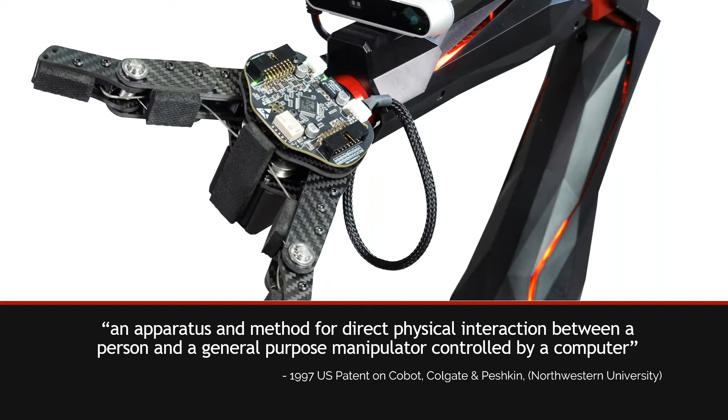According to the International Federation of Robotics, collaborative manufacturing applications can be classified into 4 different levels. In the first level, a human and robot work alongside each other, but with no shared workspace, something referred to as coexistence.

Given constraints in space, the second level combines the physical workspace of the manipulator and the human, allowing the two to share such a workspace. However, the two cannot actually operate at the same time. This essentially separates their workspace temporally instead of spatially, referred to by the IFR as sequential collaboration.

In the third level, humans and manipulators can operate at the same time and even work on the same part or machine. However, they come in no contact with each other. This contact, of course, could be deliberate and physical, but from an abstract perspective, this also refers to any tracking or sensing from the robot's side. The human operator could, of course, be keeping an eye on the manipulator and its motion, but not vice versa.

This level, called cooperation, is the first to allow the robot and human to share their workspace, both spatially and temporally. At this point, we can start seeing that we're running into concerns about human or operator safety.

In the fourth and final level, the robot responds in real time to the worker's motion. The robot must maintain an active awareness of the location and motion of the human operator and always take precautions to not harm the worker in any way. Now we are talking about added sensor suites on the manipulator, vision, and potentially artificial intelligence as well.

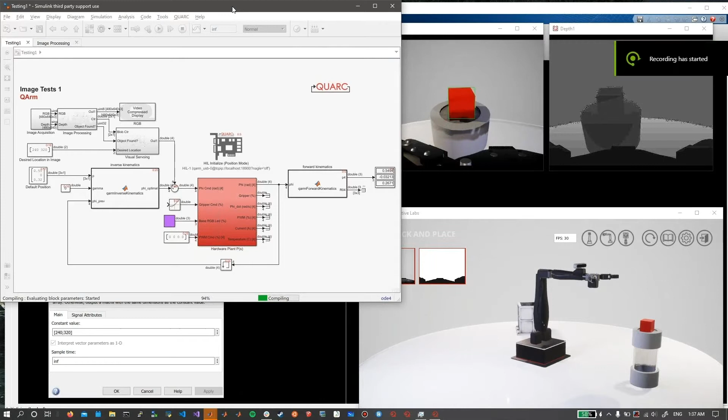The demo that I'm going to show you today began in my lecture room a couple of weeks ago. In addition to being a research and development engineer at Quanser, I'm currently also a sessional lecturer at the University of Toronto, where I'm teaching a graduate course in manipulator robotics.

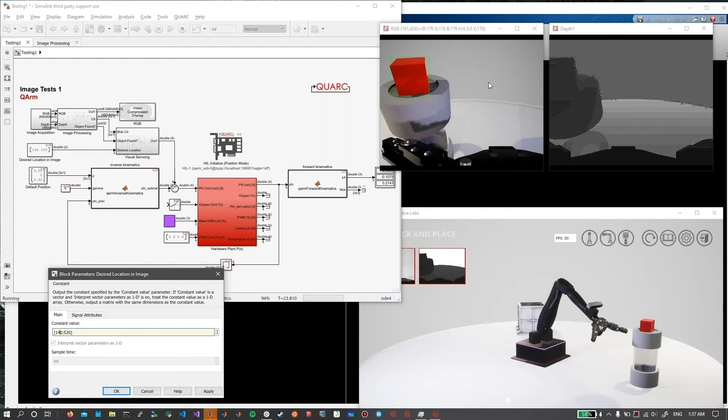We were at a stage in the course where we discussed robot vision, and after an overview of common topics such as color spaces, thresholding, blob detection, etc., we looked at a visual servoing example using the virtual QArm manipulator. All the students had access to this virtual manipulator on their own laptops via the Quanser Interactive Labs solution, which allowed them to try this example themselves.

In this example, the object is stationary and my arm is responding and moving so as to bring the object in the image at the desired pixel location that you can see me setting at the bottom left of the screen.

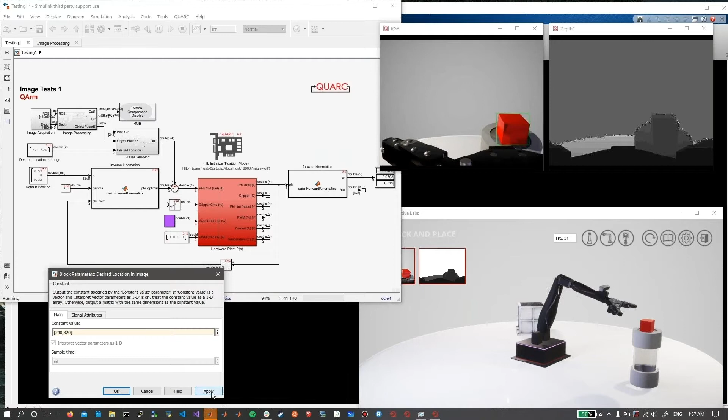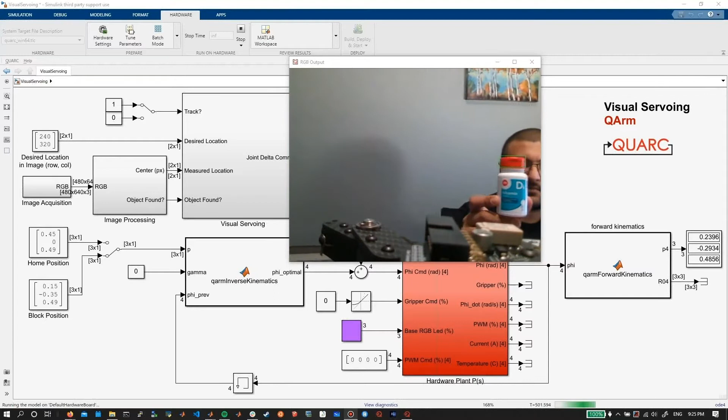After this lecture, I decided to try this on the hardware at home. Now, the object itself in this example can also move as the arm is tracking it. The arm moves horizontally and vertically by directly actuating the manipulator in joint space. A horizontal pixel error is removed by actuating the base joint of the manipulator about the vertical Z-axis.

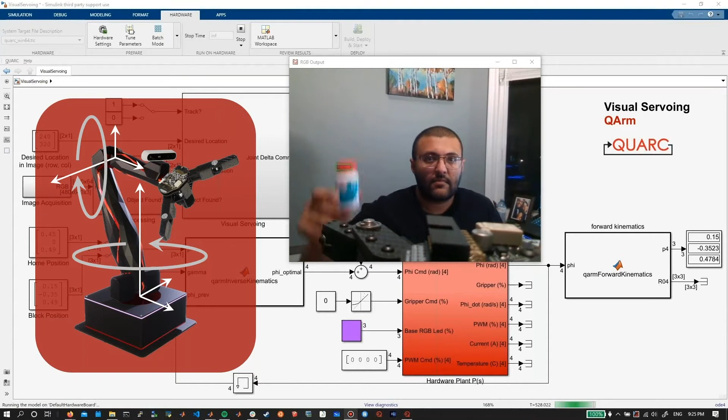And a vertical error is negated by actuating the elbow joint, making the problem a rather simple one and based purely on joint space calculations and kinematics. The tracking itself can vary dramatically with different lighting conditions and the size of the object in the image. So if I were to take a few steps backward, the lid of that vitamin bottle would be very small, and my algorithm most likely will fail to pick it up correctly.

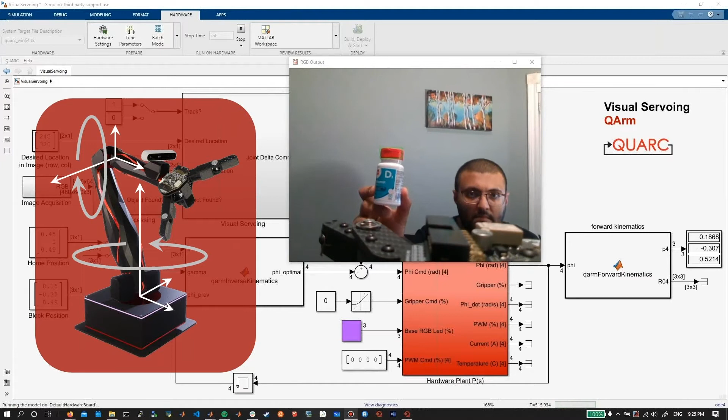To increase my personal sense of security, I did two things in this demo. Firstly, if the object disappeared, the arm would return to a known starting location, in this case, the position where it's facing me. And you will see this in a minute when I take that bottle and yank it out of the workspace and the arm faces me directly. Secondly, I placed additional safety limits to shut the controllers if the speed ever exceeded 45 degrees per second. That's really slow, but this gave me a lot of peace.

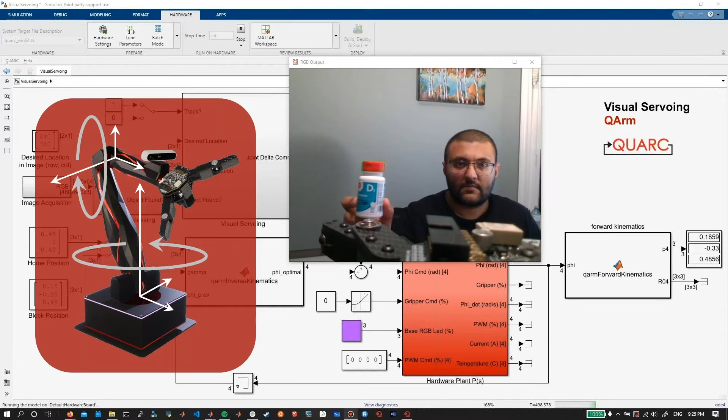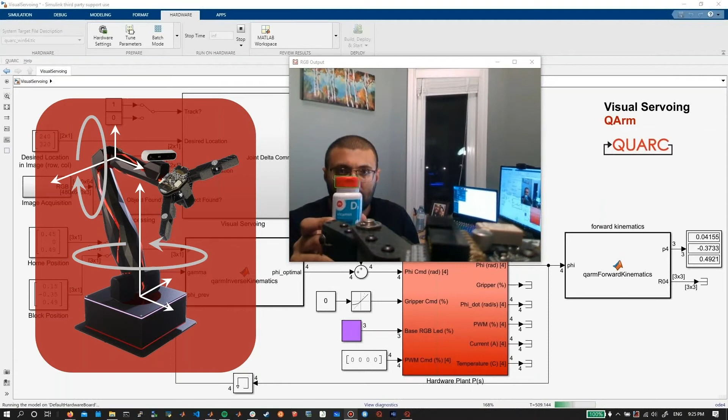It felt great at the time I recorded this demo, but come on, safety by means of limitation doesn't actually help me sleep at night. I did not intend to handicap the manipulator or its capabilities. Rather, I wanted the arm to have more freedom and start tracking how far away it was from me. I reminded myself that with 2 degrees in engineering and over 7 years of experience working with robotics and automation, manipulators should be afraid of me and not the other way around.

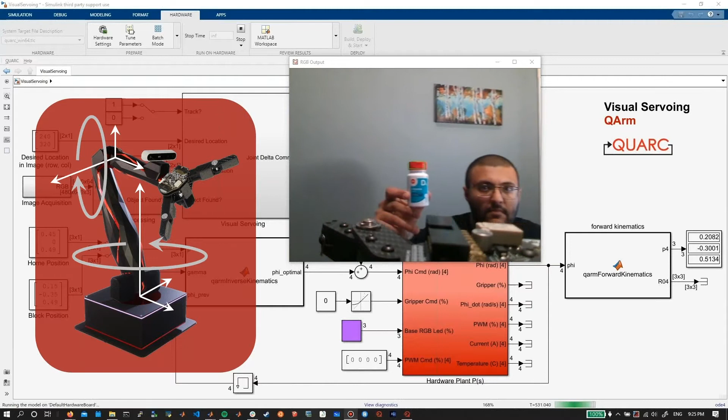I decided to repeat this demonstration, but now with the added capability of tracking the distance between myself and the robot using a stereo depth camera on board the manipulator. And so with that, I'm not going to waste any more time. Let's get into the actual demonstration. This is going to be in Simulink.

So everything that I have in red, which are these subsystems, are doing some form of input-output. They are capturing information or writing information to a device. So here I am capturing very simple toggles or trigger values from a Logitech joystick that I have. I'm not interested in using the joystick to drive the manipulator. Instead, what I'm doing is grabbing Boolean values such as track, grab, or color that allow me to change certain aspects of the code. Then I have an image acquisition subsystem that is capturing depth as well as RGB data.

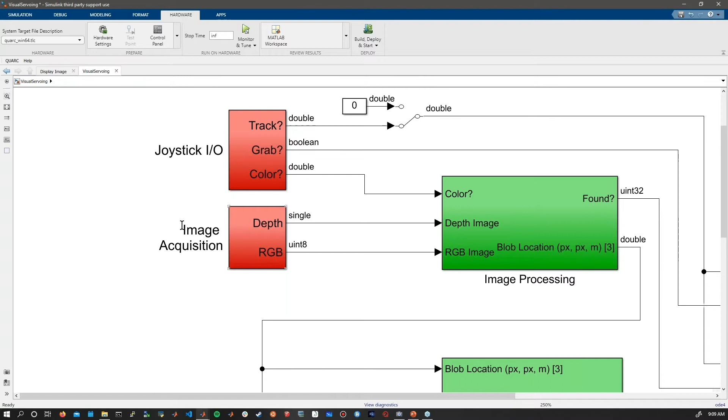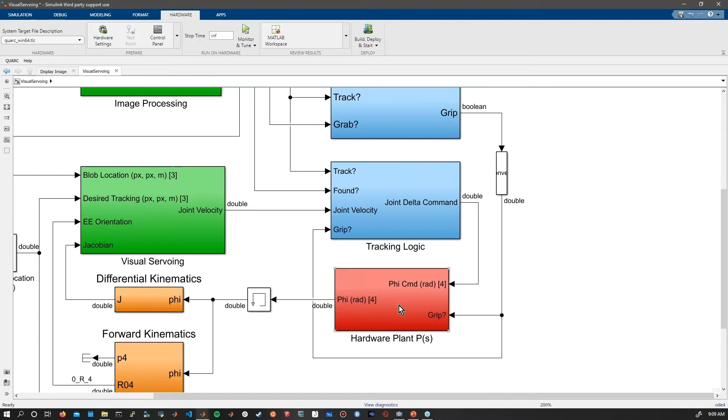And then this subsystem is the hardware plant that allows me to read joint values from the arm, as well as write the intended joint commands and whether or not I would like to actuate the gripper. So I am actuating the arm in position mode, and the low-level controllers are handling the motion for me. In addition to that, I have two green subsystems. These are for image processing. And then I have some logic and timing, and then some kinematics in orange.

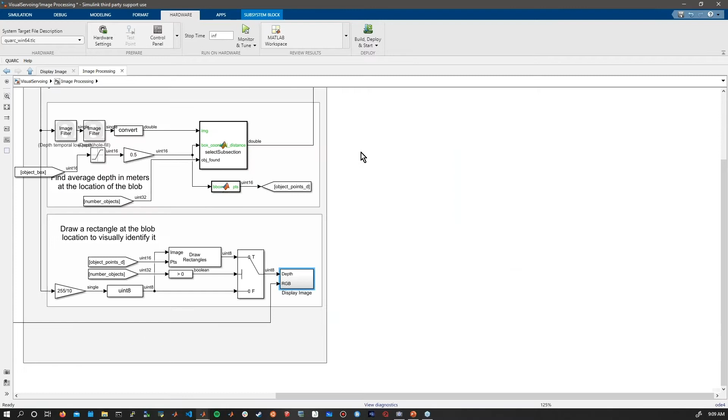So let's start by looking at the image processing subsystem here. I have both RGB processing as well as depth. And the idea is to take your RGB image, convert it from RGB space to HSV, threshold for a green or a red object, as you will see in a minute, and then take that bitonal or binary image and pass it to a blob detection algorithm that looks at connected components to label them. And that gives me the position of the blob it's found, and I pass that information to the depth processing.

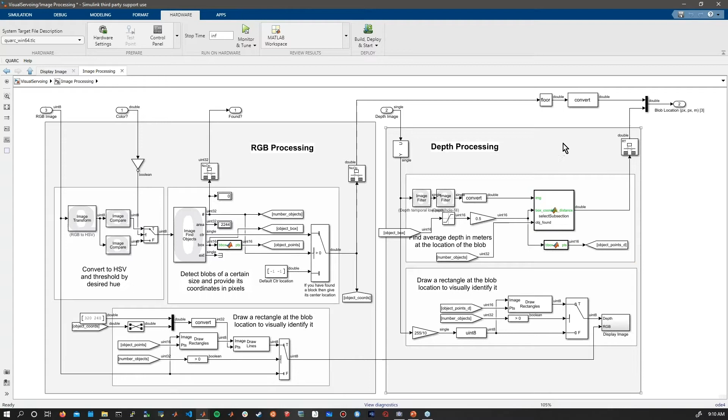The depth processing then takes the entire depth image, and after a temporal low-pass filter and a depth hole filter, it will select all the depth pixels around the object's coordinates and average them to give me the depth to the object in meters. And so that gives me the X and Y location of the blob in the image, as well as the depth, which is the Z direction in the image coordinates. And I take that blob information and pass it out of the subsystem.

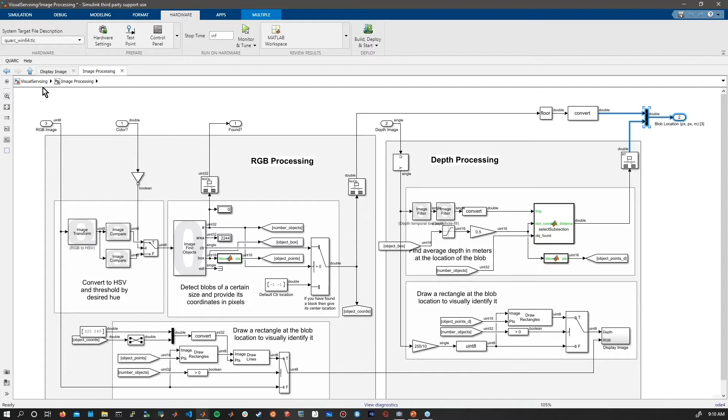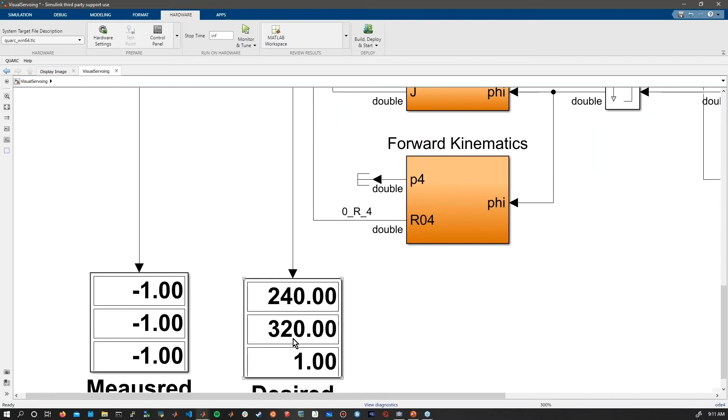I then pass that to visual servoing, which is also getting kinematic information such as the orientation of the end effector, as well as the Jacobian through differential kinematics. And I'm also passing it my desired coordinates for the blob. So you can see here, I want the blob to be in the center of my 480 by 640 image, and I want it to be 1 meter away from me. And if I pass it to this algorithm, after filtering the blob data, it is simply applying some scaling and sign correction. And that gives me end effector velocities in X, Y, and Z.

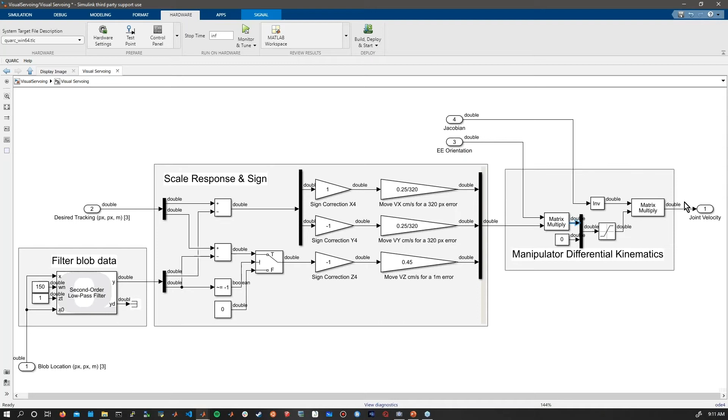I need to convert that into base frame coordinates. So I do that by using the orientation right here. And I take these base frame end effector velocities and turn them into joint velocities using the Jacobian.

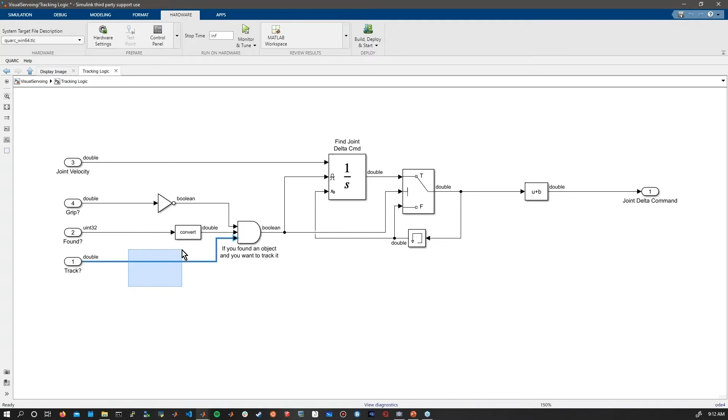That then gets passed to the tracking logic, which says simple things such as, well, if you are being asked to track the object and you've actually found an object and you're not currently gripping the object itself, then proceed to integrate those joint velocities into joint commands and apply them to the manipulator.

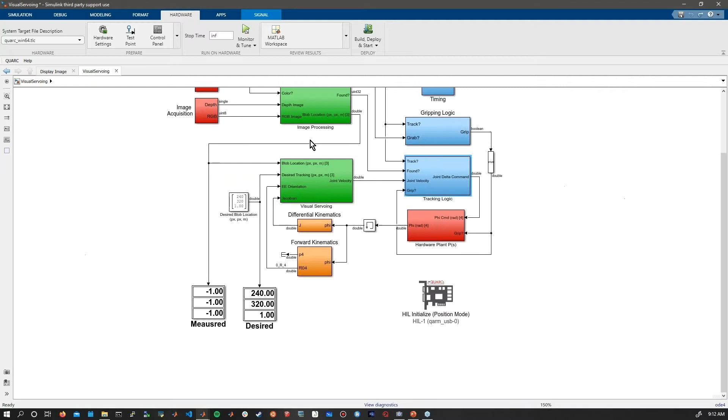So now that we have an idea of what this is doing, I'm going to move this to the left, and let's start by actually running the demonstration. So I've used the monitor and tune button here in the hardware tab in Simulink, and that will build C code from this application and deploy it to my Windows machine as a controller, controlling the arm via a USB connection.

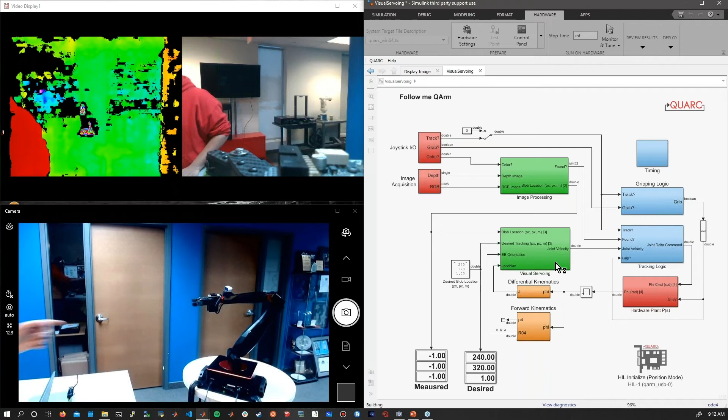Okay, so now that the LED on the base has turned blue, the code is actually running. And here you can see that is me right here in red. At the top left, you can see two images. The first part, which is on the left, is the depth data. So as my arm moves closer to it or further away from it, you can see my depth changes. And I'm applying a color map so you can visualize the depth a little easier.

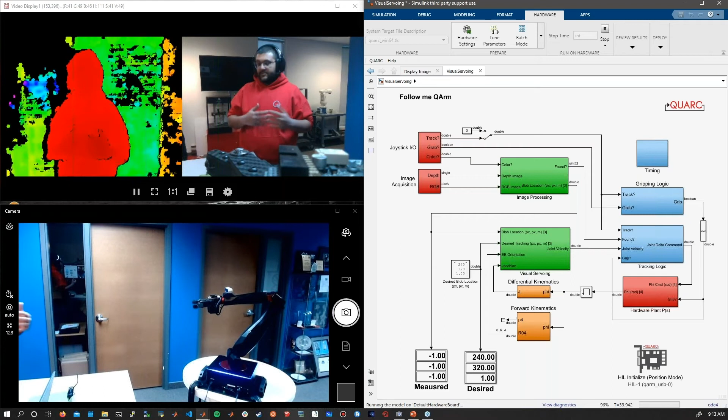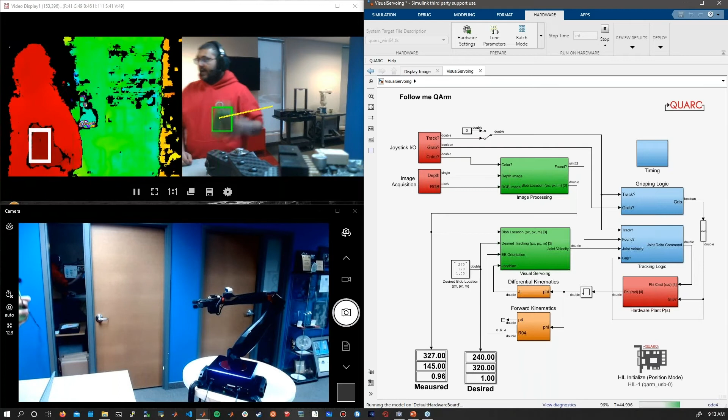Now, it is coincidence that at roughly the desired distance, which is about 1 meter right now, the depth data is actually red and I'm wearing red, but that again is a coincidence. This wasn't planned. But what I'm going to be doing here is I have an object right here that I've picked up. This is green, of course, and I want the camera to track this object.

So based on the videos that I have posted on LinkedIn in the past, and you saw me show you in the presentation, what the arm would do is track it left and right. But in this case, it will also track depth to the object.

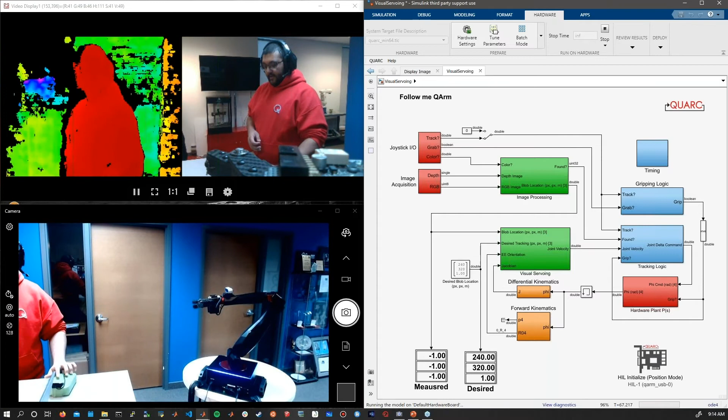Now, before I run it, I have to tell you how exactly I'm using this joystick. And so on this joystick at the very top, I have two triggers. And these are going to allow me to ask the arm to start tracking me or stop. And it's going to allow me to pick the color of the tracking.

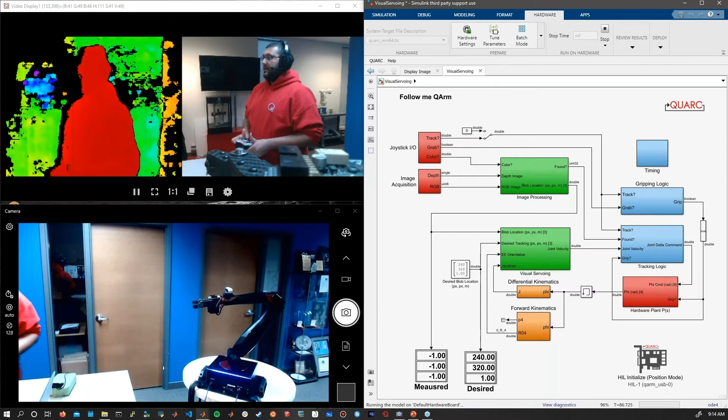So you can see here that the webinar screen sharing is starting to slow down my controller a little bit here. And I think it's back. There we go. Okay. So let's go back to this object.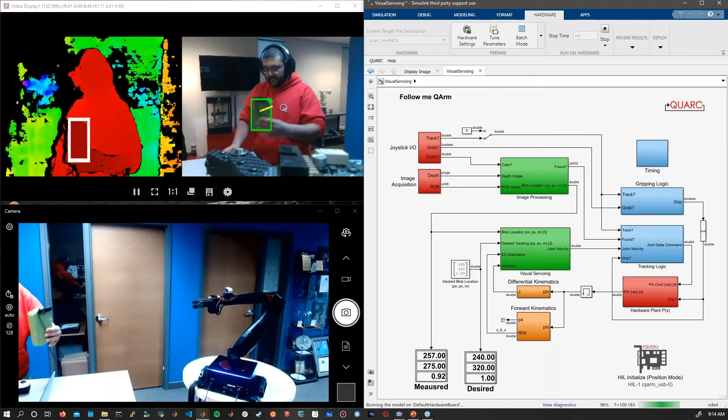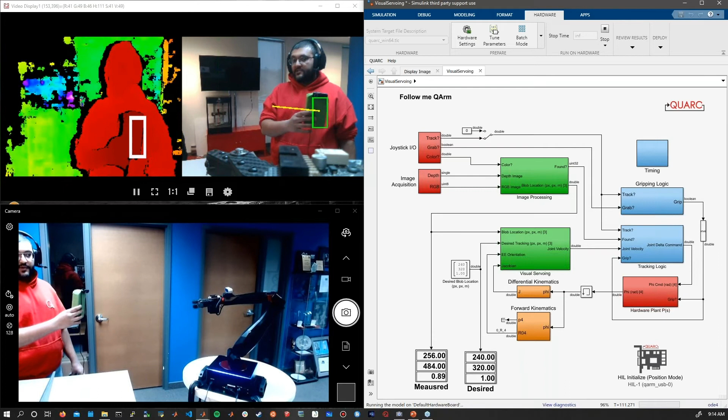The yellow line is drawn from the center of the RGB image to the current location of the blob, and it should give you a sense of where the arm will respond and move towards. So if I use the first toggle, it will go from tracking this object, which is green, to tracking me, which is red. But I want it to track the object right now. Let me hit the second toggle.

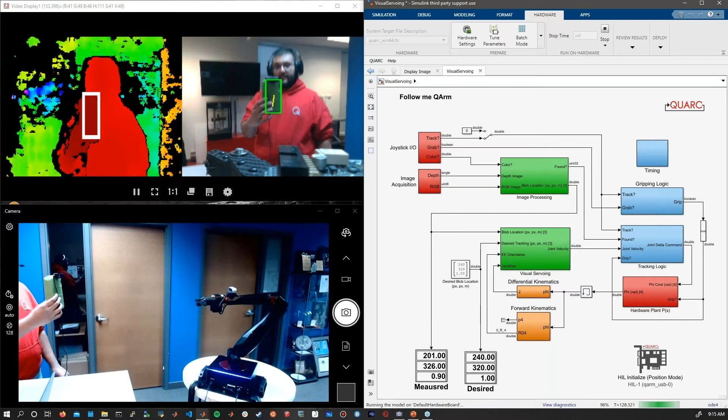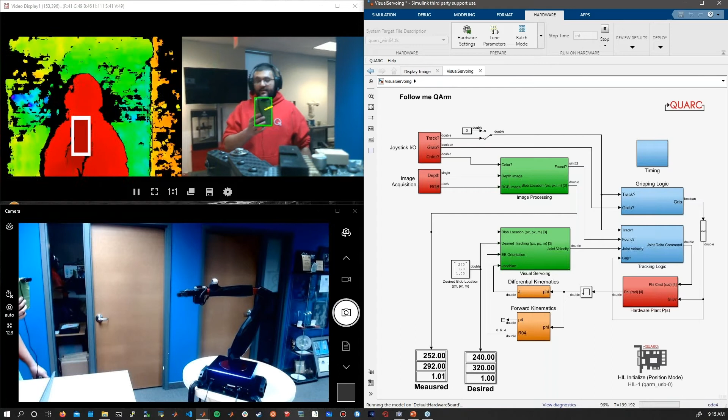And right here, you can see the arm starting to track this object. As I move further away, it comes towards me. If I go closer, it moves back. But I can move it around, and it tracks the object.

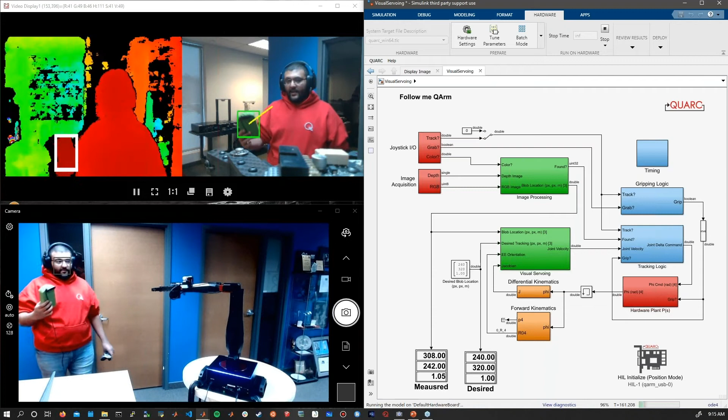Now, at the same time, I could tell it to simply start tracking me. And so this is where I am. And let's see if it actually tracks me as well. And it's trying to keep 1 meter of a distance from me as I move around in this space.

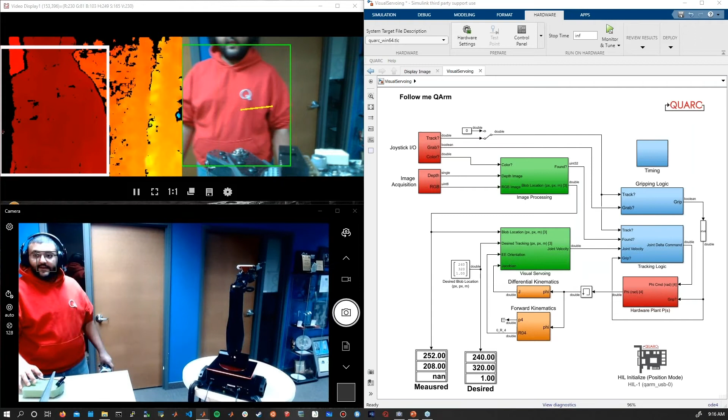And that right there was a workspace singularity. So you can see that the LED has turned red, the model has actually stopped, and this was the speed safety limit that I had put into place. So I got a message right here. The arm was moving close to a maximum speed. And so that has stopped this controller, which was designed for safety.

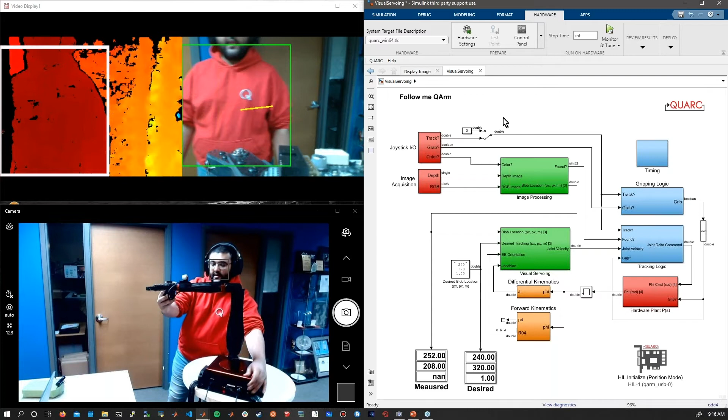So I can reset the arm by simply powering it off and restarting it and deploying the model again.

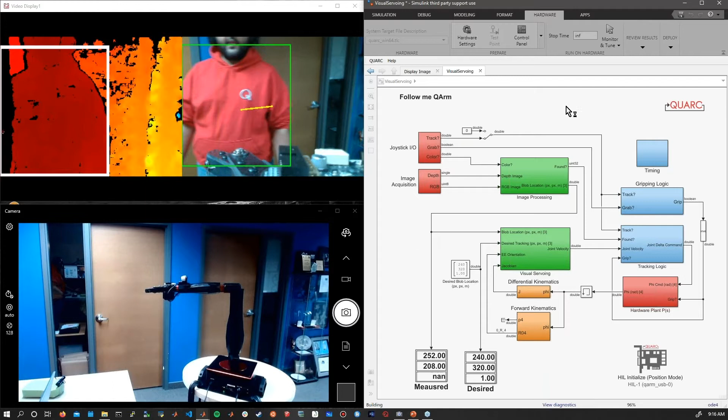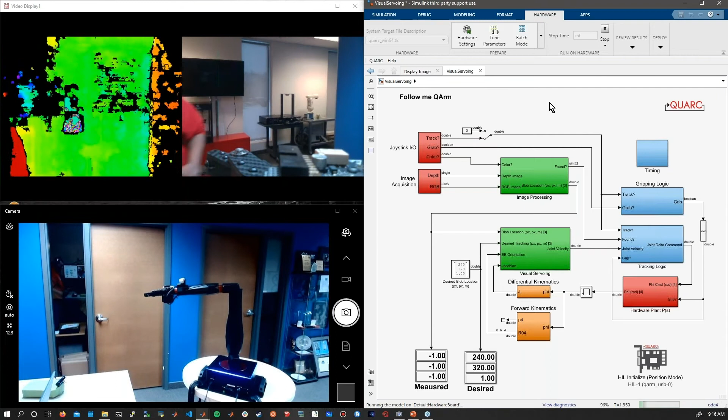There we go. Back to this object and being able to track it. So this is the idea with Simulink. You can easily change the controllers as you desire, monitor what's exactly going on in real time. If something happens, you can check out all your scopes to see what exactly went wrong and then retry again.

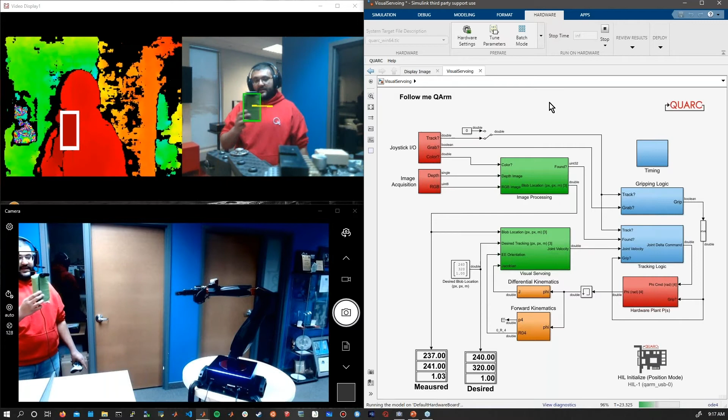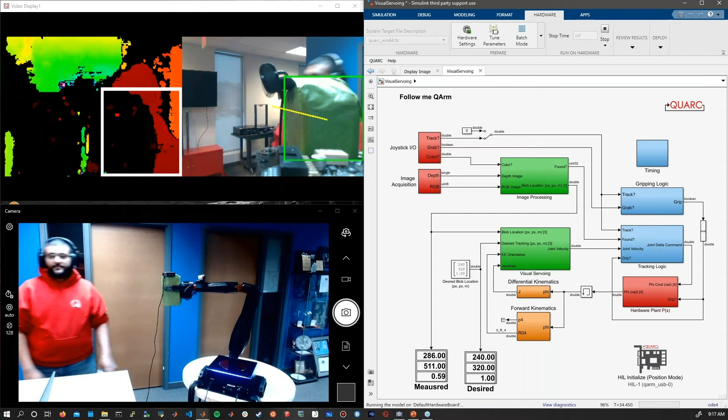At the same time, I can tell this manipulator to simply go ahead and grab the object. And that's the demo.

So where do you actually go from here onwards, right? The depth data here is calculated using the left and right infrared cameras on the Intel RealSense right now. And I am using the depth data that's coming straight from the camera, but you could, of course, use the infrared directly to estimate your own depth and improve the depth quality.

I'm also currently assuming that the depth and RGB feed share pixel coordinates because I have the same camera resolution. But the lenses have a small linear displacement between them, which needs to also be accounted for. You can also use the camera that's right here with pre-trained neural networks or object classifiers to recognize humans, recognize objects, and then take action based on that.

You can add additional safety routines to avoid singularities. You could add your own sensors using the onboard end effector board that we have to sense them and actuate and get the data you need. You can also use the onboard current sensors at each of the joints to detect if the arm has come into contact with an object or a person. And you can add multiple cameras to track the workspace that is being shared between the human and the arm and identify both their motion.

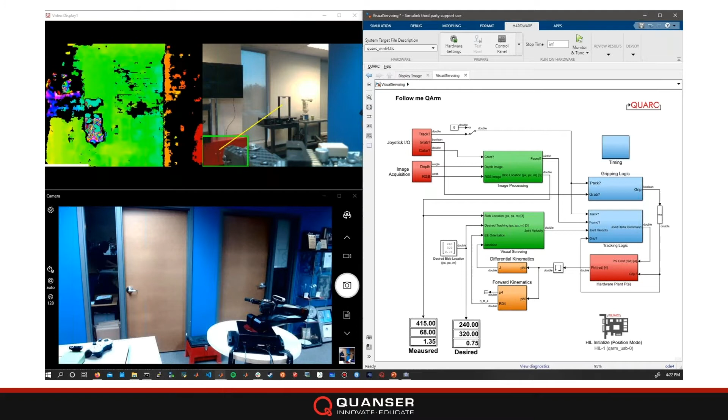Now, the idea here is that it took me less than a week to develop and validate this demonstration on the QArm with my limited knowledge in robot vision. With your resources, knowledge, time, and an army of PhD students, I can only wonder where you can take your own ideas. If you have any questions, I will be happy to take them, and then I can also get into more details of the algorithm with you based on the questions.

Thanks, Murtaza. That was a fantastic presentation. I really enjoyed it, and I hope everybody else did as well. A couple of questions have come in.

First one, is the solution out of the box a cobot? Okay, so the International Federation of Robotics defines many different levels of collaboration between robots and humans. And so a manipulator being a cobot has to have a lot of onboard safety introduced by default. And so this manipulator is a 4-degree of freedom arm that can enable you to do cobotics research and implement your cobotics algorithms to verify that they work before you deploy them to other cobots.

Now, more often than not, industrial cobots come with their own proprietary software, and this is a language that you as an academic may not speak. You might be comfortable with Simulink, with MATLAB maybe, with C++ even, or Python or ROS, but the proprietary software that the arms come with does not allow you to comfortably change the aspects of the design and experiment with it. So what this allows you to do is validate your algorithms comfortably and then figure out ways to actually deploy it on industrial cobots.

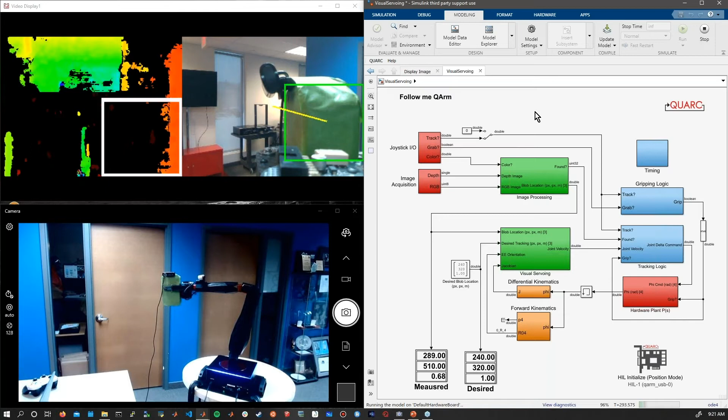Thank you. Next question, how is the continuous controller being discretized? So that is using our software QUARC. So right here as the model is running, if I go back to the modeling tab, open the model settings, you can see that I have asked this entire model right now to run at 240 Hertz. And so this is turned into C code deployed on my PC, and then our software QUARC is what makes sure that you are getting that sample time and that performance.

So right here I have a timing subsystem that is showing you the sample and computation times on both the fast rate, which is 240 Hertz, as well as the image rate. So if I take a look at that scope, you can see the sample and computation times right here. So 240 hertz would be somewhere between 40 and 50 milliseconds. So you can see that is the sample time. And then you can see the computation time below as well. Now I can just assume that a lot of this is choppy because the screen is also being shared at the same time.

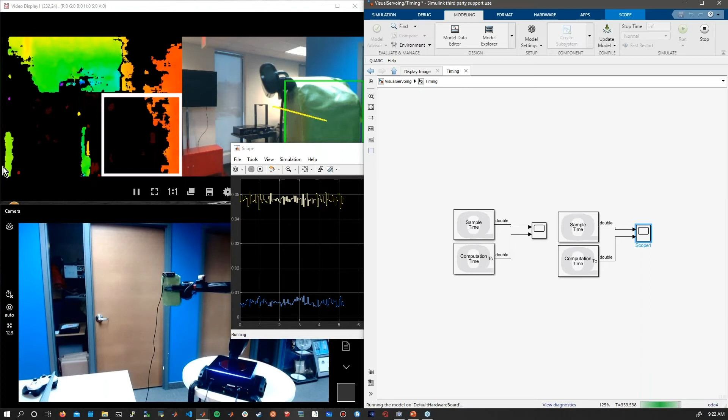Great. Next question. What is the realistic upper limit of the sample time that can be used for a model such as this one? So the QArm, all our default examples that come out of the box with it are all running at 500 hertz, but I believe you could push to 1 kilohertz with this manipulator. And that is for the base rate itself, but then you have additional processing for, let's say, the camera. The Intel camera that we have provided on here can do depth processing at up to 90 hertz and RGB processing up to 60 hertz as well.

Is there a teaching mode for path planning?

So the teaching content is very scaffolded and limited to allow students to learn different concepts in a safe way. And so one of the labs there does actually look at path planning and trajectory generation. So let me share my slides again, and I can show you some of those concepts.

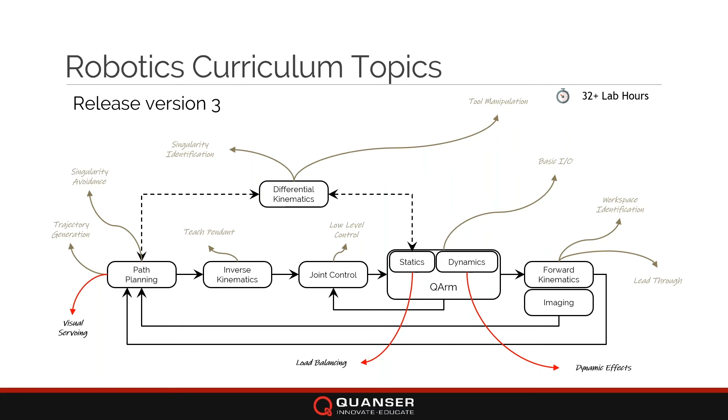Great. Next question. What are the range of speeds available for the arm when tracking the object? Yeah, so this comes down to the application at hand. So let me get into a little more detail here to first show you the safety limits that I placed here. So if I go into the hardware subsystem and my output, you can see that I'm monitoring the speed right now to say if it's greater than 90 or pi by 2, stop the model, right? Now you can see my comments here for 45 and 60, but again, the more comfortable you are with the arm, you could change this.

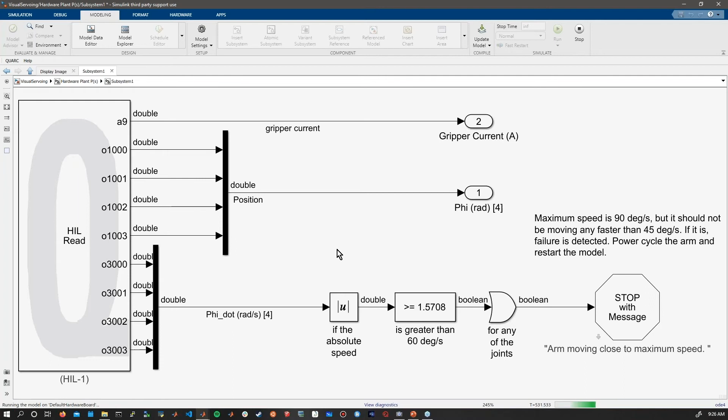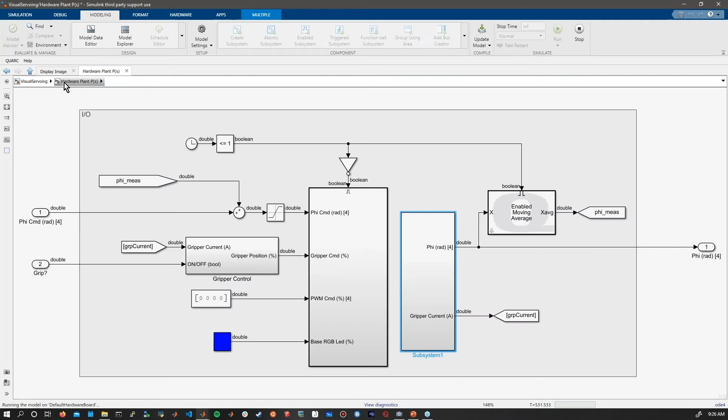The actual arm can move very fast. So with no payload attached, it can go up to 180 degrees per second on the different joints. But we place these safety limits. Now, these are what I call very soft limits because these are in your Simulink code directly. In addition to that, in the HIL initialize routine here, you can also place certain hard limits on the speed as well as acceleration.

So if I stop this model, probably from the hardware tab, or from the console. Okay, there. You can see that you can also place additional safety speed and acceleration limits right here. So for example, a lot of the student models for their curriculum come with 90 degrees per second and 60 degrees per second squared limits. So the arm moves very slowly and comfortably as they learn different topics. But if you set them to 0, that essentially sets no speed or acceleration limits.

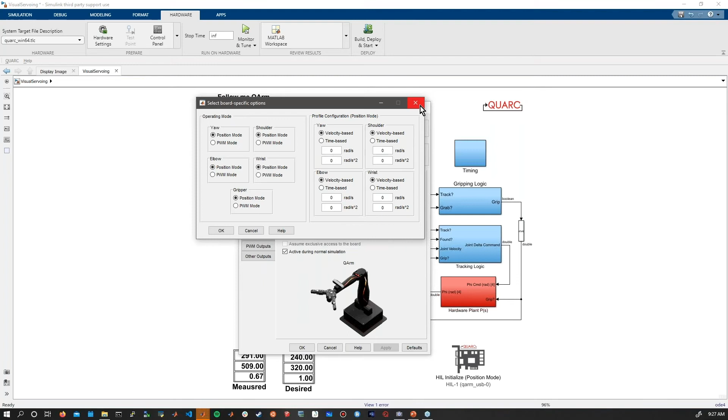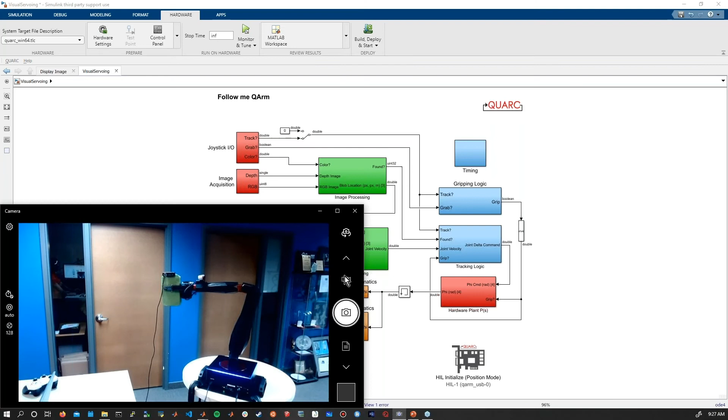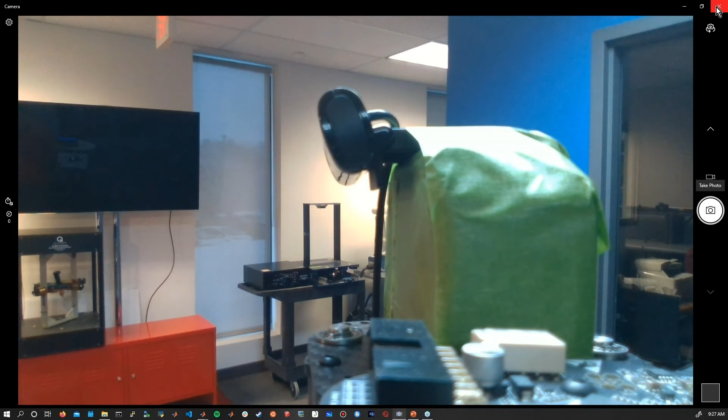Great, thank you. Can you comment a little bit further on the gripper itself? Are there different types of grippers that we provide, or is it just a single type? Okay, so let me see if I can switch cameras here. There we go. That is the arm camera. So let's switch it one more time. Not this one either. There we go. So this is the camera that's on the object itself. And so now I can show you the gripper on the arm right here.

So this is a 5 contact point gripper. You've got 1, 2, 3, 4, and 5 pads. This has actually got articulated fingers on each of them. And so when you tell it to grip an object, it grips by sensing current, and it will only apply enough strength to pull a certain amount of current from the actuator. And if it detects the object, let's say shuffling or fighting, it will loosen its grip as well. That again depends on the code I'm running right now.

But in addition to that, you've got this end effector board right here on top that allows the user to add their own sensors to it. So this is the gripper that we provide with the arm right now. However, there is a standard ISO mount right here. So you could replace this with your own gripper design if that is an avenue you would like to pursue.

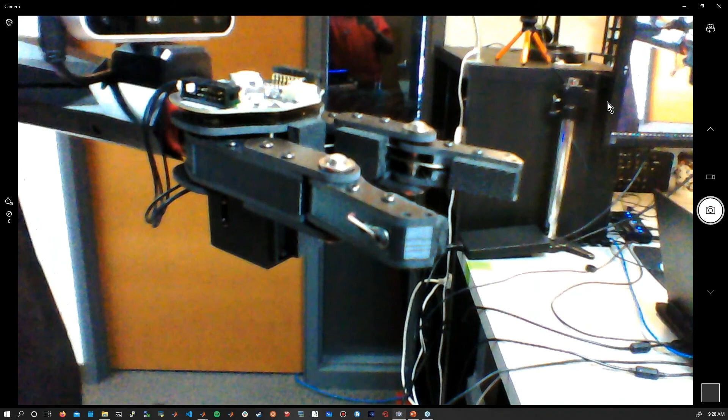Thank you. I have another question. Someone is wondering if the arm can be installed on a moving base without losing precision. Very interesting question. Please, for sure, try it. We would like to work with you to do that.

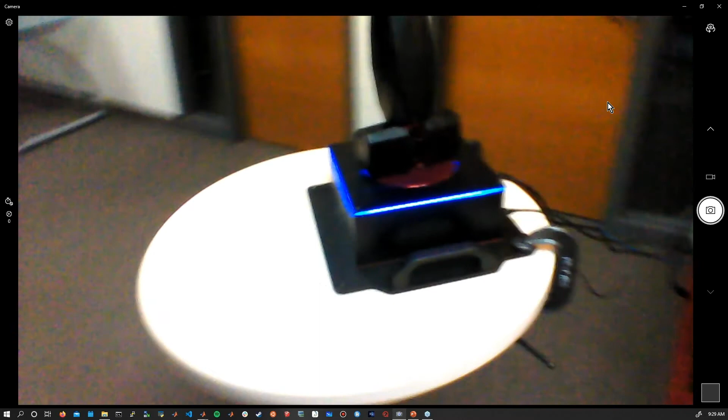The arm right here, if you notice, has mounting holes. It's hard to probably tell from there, but you could mount this platform directly to a mobile robot, of course, as long as it can provide the power that the arm needs. But the arm itself is pretty rigid. So right now it's attached rigidly to this base, and it has a repeatability metric of 0.1 millimeter. So I doubt it would change quite a bit depending on the performance of the mobile robot itself.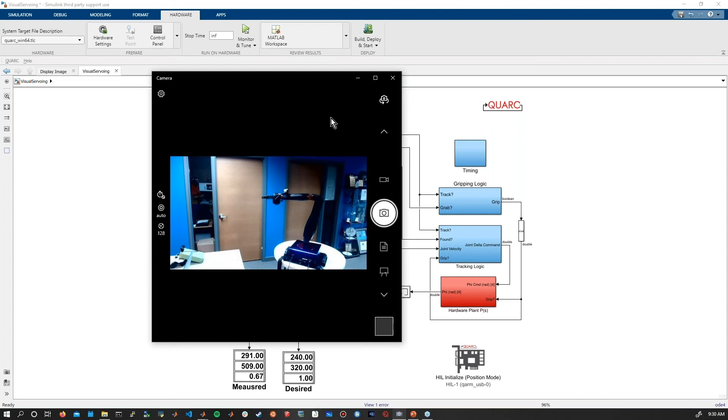In terms of power, that's another consideration to keep in mind. The arm, of course, has a 12 volt, 16 ampere connector that is connected to it. And so when you're trying to move this around, it has a lot of juice. And I don't think the Cobot can actually provide it. But there are options that we are considering on the side. And if you are interested in something like this, a direct conversation could be initiated with that.

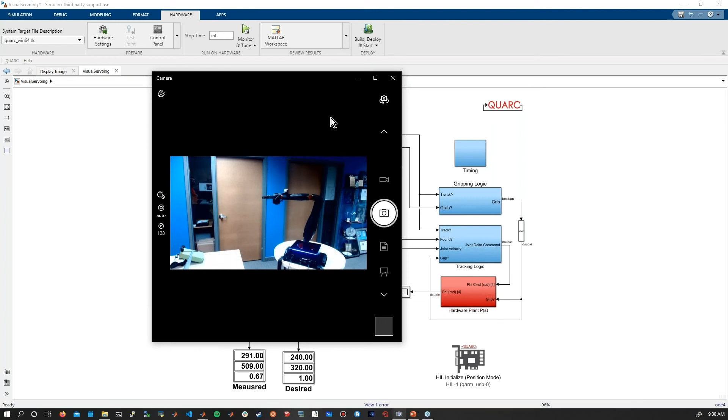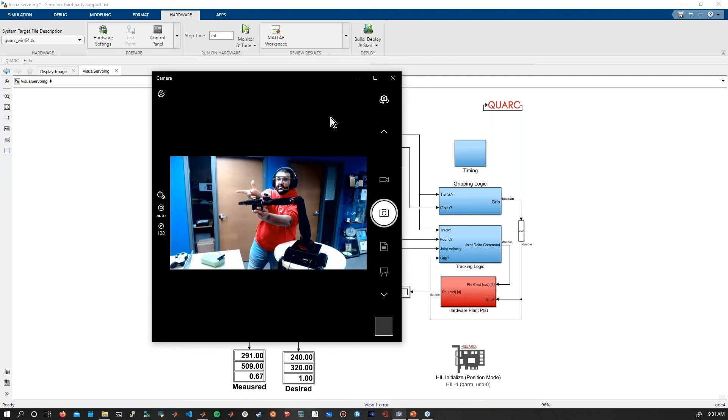Another question I have, could you please describe in more detail how the manipulator tracks the object that you used in this demo? Sure. So consider here, this is the object again that I was earlier tracking. I'm going to turn off this arm so that I can freely move it around and talk to you about it. So as the object here moves sideways, I am asking this end effector to also linearly move sideways. So if you attach a frame to it, the z-axis going directly along the link, the x-axis going straight up, and the y-axis going towards the left right here.

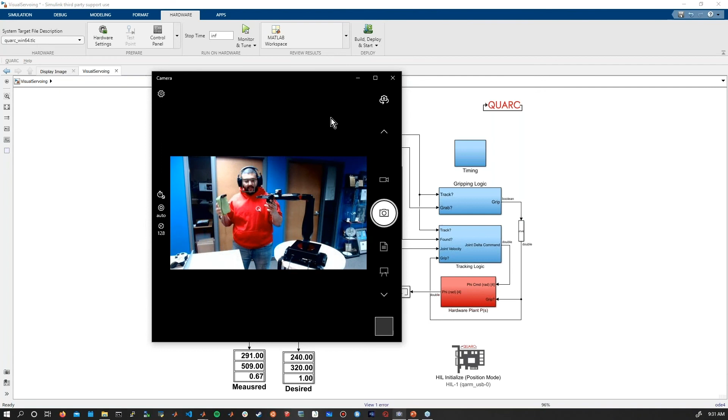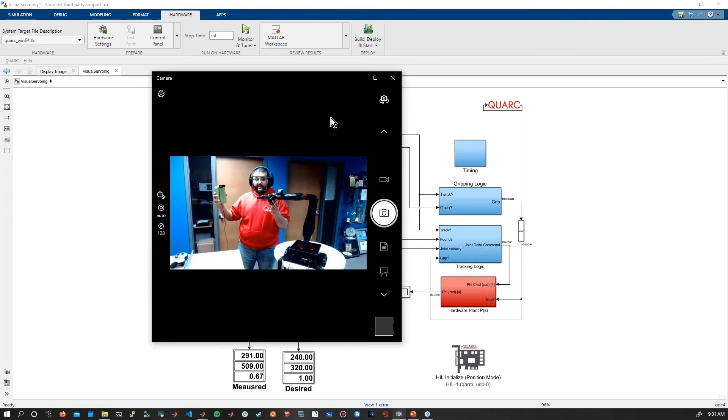And so based on the horizontal and vertical pixel error, I command end effector velocities in the x direction, which is vertical, and y direction, which is sideways. And then based on the depth camera's information, which is the distance between the object and the manipulator itself, I command the end effector to move along its z direction.

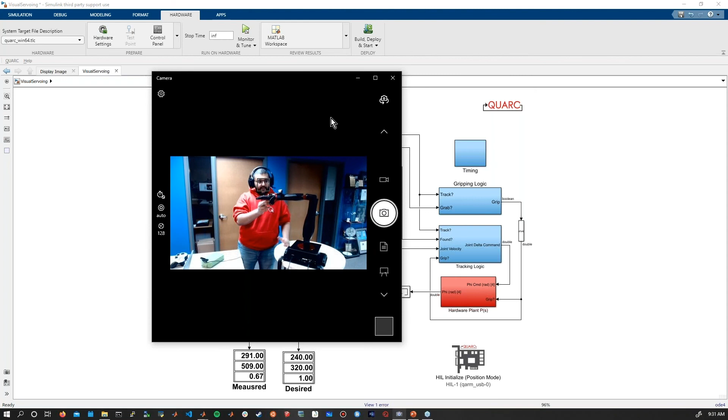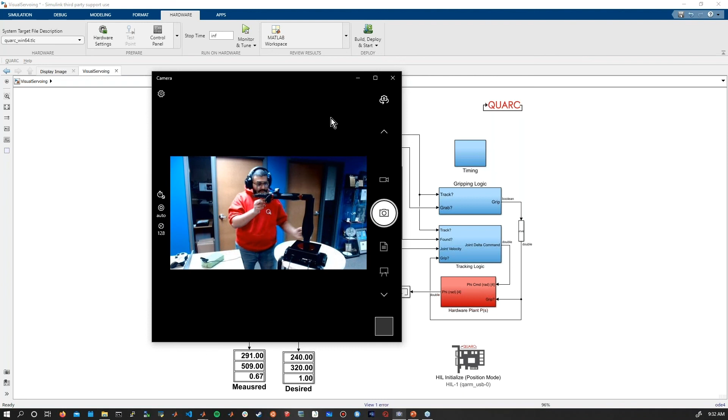Once I have these velocities for the end effector, I use the orientation matrix 0R4 from the base to the fourth frame to transform those velocities back into base frame coordinates. And then I pre-multiply that with the inverse Jacobian to convert them into joint space velocities, and then command that to the base, shoulder, and elbow joints. And that's how the manipulator tracks.

I have one final question, but before I ask that, I just want to correct something. The repeatability that we actually have is plus minus 0.05 millimeters for the arm. Okay. Final question, what is the maximum cable length with the arm? The cable length, okay, so that depends on which cable, of course. The USB cable itself does not have a limitation. We provide one with it.

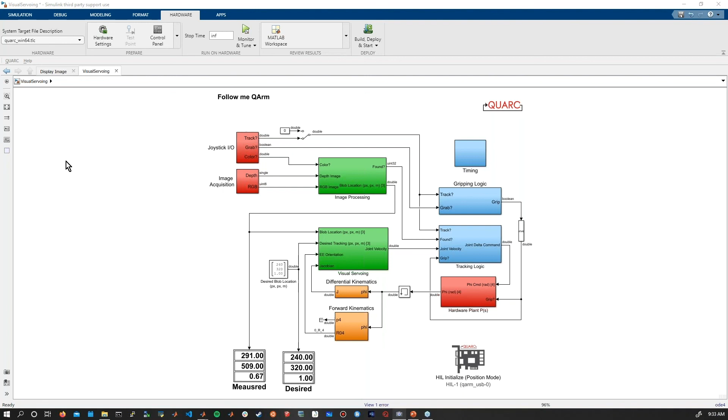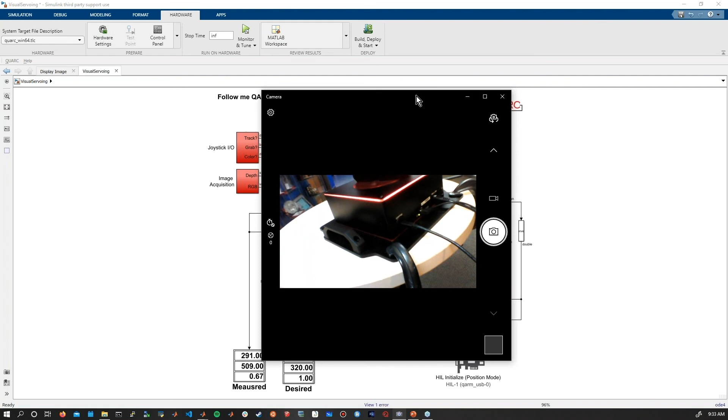The camera cable has a limitation for sure, depending on the resolution you're interested in getting image data at. So if you want the full 1080p RGB image, then you need to use the cable that we provide with the manipulator. Let me switch back to a camera so I can show you these cables. Okay. So notice right here that I've got a camera port right here. This USB cable is directly connected to my laptop, and its length is limited since I need the resolution from the camera to be maximum. If I use an alternate cable, you're going to get a lower resolution with a longer length.

Of course, you could disconnect the cable from the base right here and directly connect it to the camera itself. So if I were to pull this cable out, you can plug yours in directly into the camera, but this would be hanging over the manipulator. So if you were to focus on direct vision research with this arm and you were not interested in moving the manipulator around too much, this is also an option.